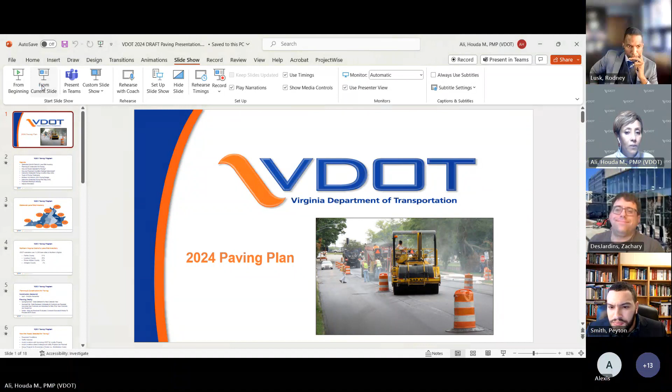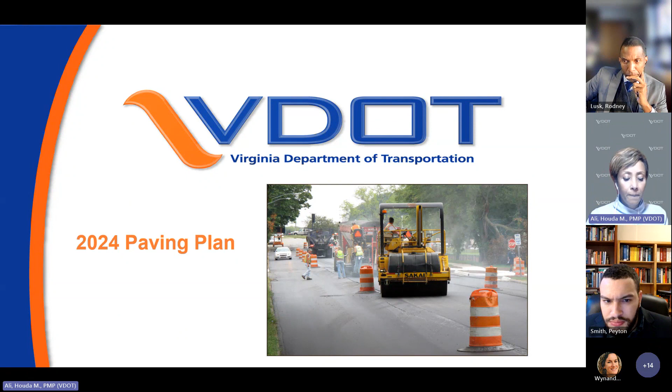On the agenda tonight, we'll be speaking about the state lane mile inventory and lane mile inventory for the Nova district. The planning and construction is part of the paving schedule. We will also cover the process for how roads get selected for repaving and how the pavement condition is determined using the CCI rating system.

We'll present information about the dashboard and the pavement condition targets for this year and the various types of pavement treatments, and speaking about this year's budget as well, and the different types of pavement marking and striping before we transition to the county's presentation on the topic.

As you can see here, Nova District has over 14,000 lane miles. To put this in perspective, it is the equivalent to going to the West Coast and back 2.5 times. The actual number might be higher than what this slide shows because it does not include the lane mileage for ramps and the recently added roads.

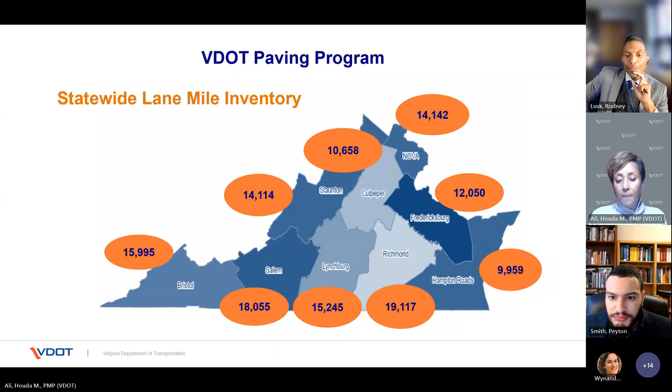The construction aspect of the paving is seasonal, and it takes place during the warmer weather months from spring to summer to early fall. However, the planning process for paving is a year-round process.

The process starts in spring going into summer with data collection for the next season. Over the summer into fall, we start analyzing the data, determine how much need is there compared to available funds, and prepare schedules and coordinate with central office. Then in winter, we close out the contracts, put out new contracts for bids, award and execute the new contracts by early year, February into March.

How do our roads get selected for paving? This is a question we get quite often. VDOT identifies roadways which are selected for paving by using the Critical Condition Index, or CCI, system.

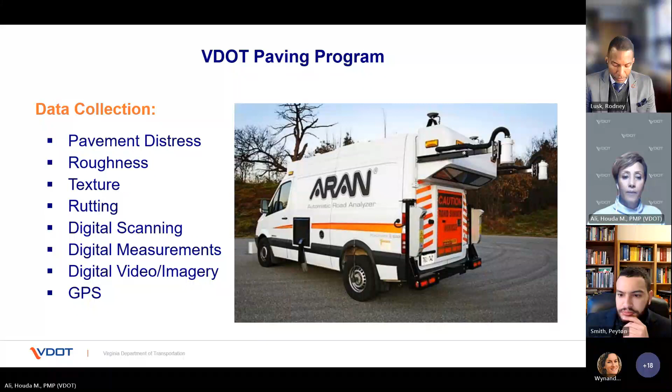The frequency of data collection depends on the type of roadway. Data is collected annually for interstates, primaries, and high volume secondaries — those with average annual daily traffic higher than 3,500 vehicles per day.

For low volume secondary roads below 3,500 vehicles per day, with route numbers of 600 or higher, which make up the majority of the mile inventory including residential streets, we cover 20% every year, with the goal of covering the full lane mile inventory every 5 years. This lower frequency is because of the higher mileage and limited resources.

Once the pavement condition data is collected and analyzed, it gets a rating on a scale from 0, being worst, to 100, being the best, like in the case of a new road. The rating system we use is called CCI, which stands for Critical Condition Index.

We focus on very poor and poor roads with sufficiency ratings below 60 CCI. We do not pave or repave roads with ratings higher than 60 CCI.

On these slides, you see a screen capture of the VDOT pavement condition maps for 2023.

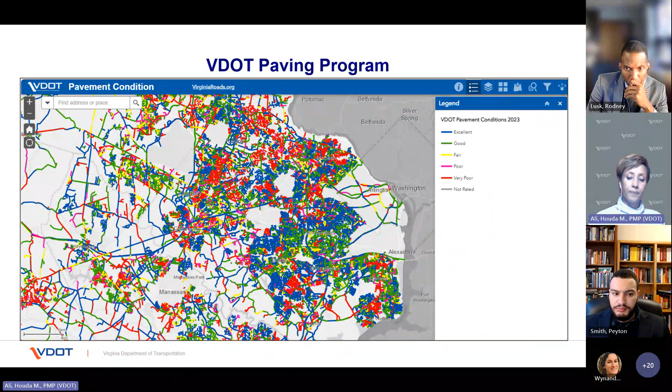In general, there are different types of pavement treatments, with two major ones. There is preventive maintenance, where we try to extend the life of the pavement by applying slurry seal. We also do limited patching and crack seal. Candidate roads are typically not in poor condition and have a CCI rating above 60.

The second type is corrective maintenance, where we do mill and overlay. 2-inch is most common, up to 4-inch depending on the road condition. This treatment is the most common and targets roads in poor condition.

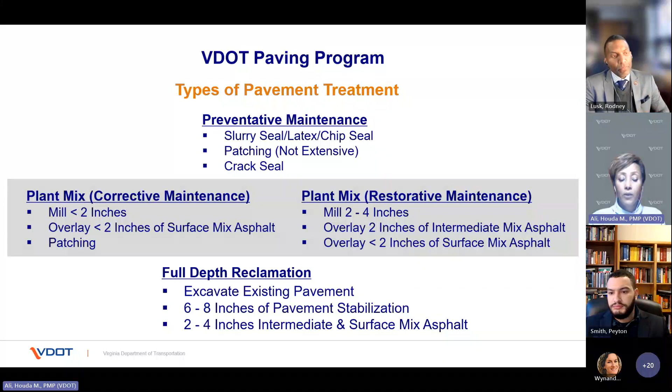The majority of roads fall into this category, with 90% of the budget going toward this type of treatment. In rare occasions, we may have to replace the pavement to full depth and rebuild the road. Roads targeted with this treatment are typically very old and were built to old standards.

It's also worth noting that while the budget increased this year, there is a downtrend in lane miles paved and an upward trend in cost per lane mile. These are due to inflationary pressures. What that means is we are not able to pave as much as we did in prior years because of the inflation.

Our VDOT infrastructure and maintenance teams have determined that about 43% of our low volume secondary roads have critical condition index, CCI, ratings in the 30s and 40s, indicating very poor condition and due for repaving. At current funding levels, we pave about 6% of the road network each year, and the NOVA district continues to work diligently to catch up on paving roads across Northern Virginia.

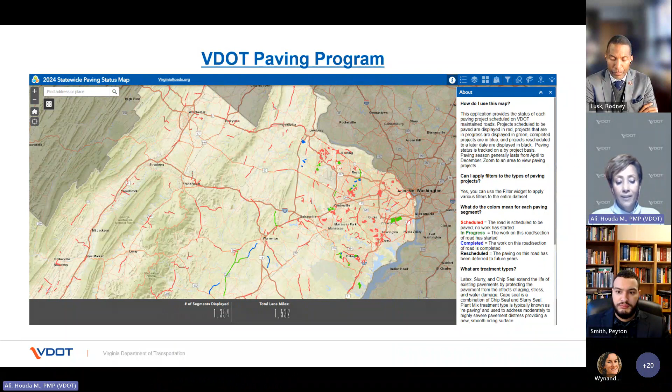VDOT tries to take advantage of the repaving program to implement road striping in ways that enhance public safety and operation. We strive most commonly to replace in-kind, putting back what was existing before we mill and repave. We may occasionally improve traffic conditions by extending a turn lane, for example. We also take the repaving opportunity to collaborate with the county to implement new marking patterns to reduce the width of travel lanes, enhance on-road bike routes, and add new crosswalks to improve pedestrian safety.

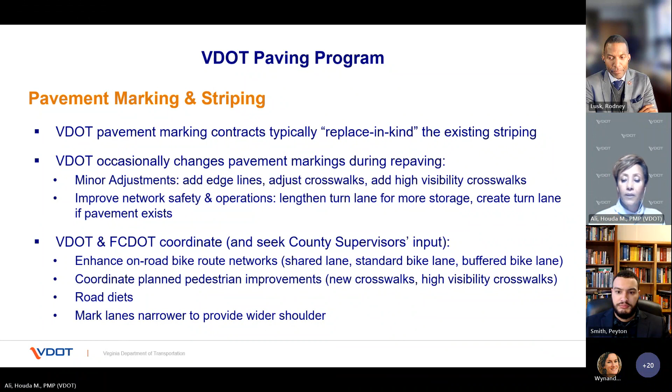Thank you, Houda. The VDOT staff do really work very hard to make the dollar go as far as they can in this program. We're delighted to present to you a couple different options for the Franconia district and the Mount Vernon district.

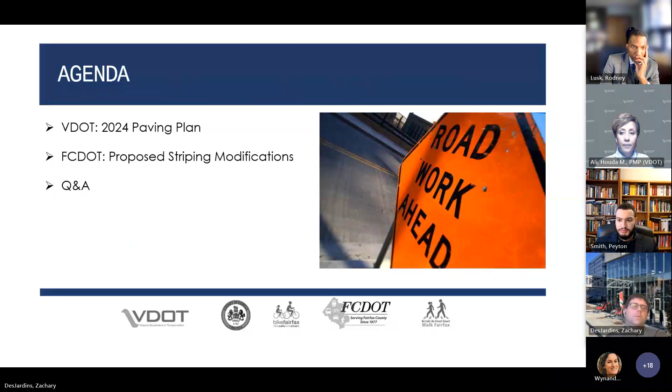So typically I'll explain briefly what our proposed striping modifications are. As Houda mentioned, VDOT and FCDOT collaborate to improve traffic safety. We review a draft repaving plan and identify opportunities for improvements, usually crosswalks and bike lanes, but sometimes other things like shoulders and bus stop relocations. VDOT will develop the striping plans and signing plans and coordinate implementation with the contractors doing the hard work of repaving your street.

Fairfax County leads the public engagement, that's why we're here tonight, as well as coordination with the supervisors. In addition, VDOT will identify and reconstruct substandard curb ramps to improve accessibility. Once the repaving is done, Fairfax County will come in and install the signage for roads that have gotten bike lanes or new crosswalks.

As I mentioned, we look for crosswalks or potential crosswalk locations. We study busy pedestrian crossings that don't have crosswalk markings to determine if they meet the VDOT warrant, essentially the requirements to mark them, and see if any parking restrictions are needed to improve visibility of people using the crosswalk to drivers. VDOT has done a great job in recent years upgrading existing crosswalk markings from the standard two lines to high visibility markings, which mostly look like piano keys. Occasionally we'll find a potential crosswalk location where we can pave a little island that we could eventually upgrade with concrete in the future.

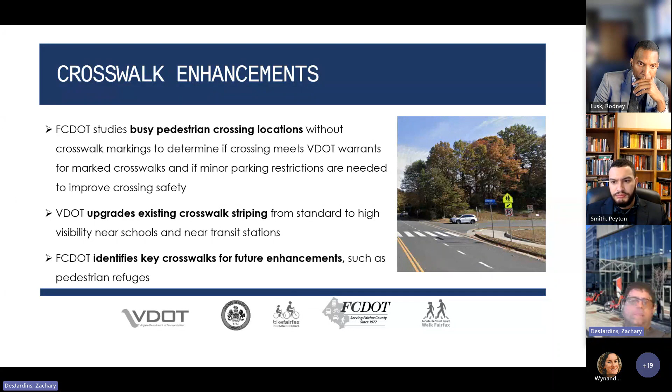In Fairfax County, many of our streets were built with much wider than needed travel lanes, or too many travel lanes, resulting in road safety issues such as speeding and inattentive driving. Repaving provides an opportunity to right-size the travel lanes and the roads, and also provide new bike lanes and turn lanes to improve safety for everyone. Typically we don't adjust traffic capacity at signals, and we usually maintain legal street parking, although we've got some options for you to consider tonight. We also have a countywide bicycle master plan, an important tool to help us add new bike lanes to meet the intent of that plan.

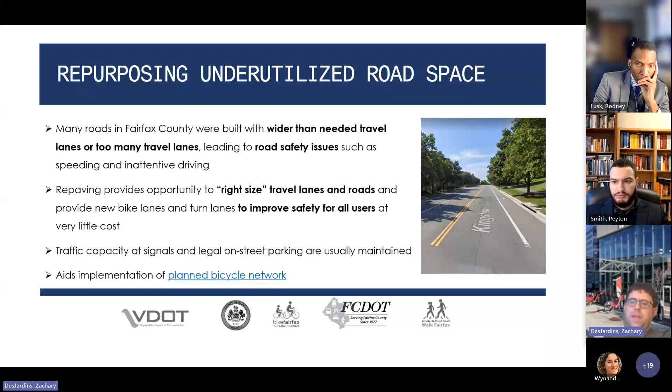There are a couple different kinds of bicycle facilities you'll see in Fairfax County. You'll see sharrows, which are just shared lane markings, though those are less commonly used now. Most commonly, we provide standard bike lanes, either next to a row of parked cars or next to a curb. We're trying to get more buffered bike lanes in our future projects, as well as some that we proposed to you tonight, so there's a bike lane and there's a nice space between you and the travel lane.

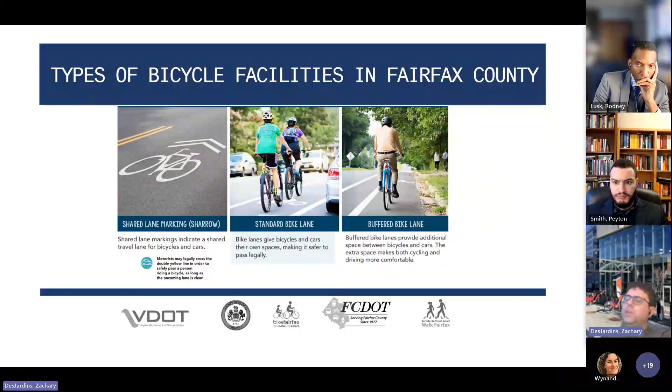Primarily the types of bike lanes we'll show you tonight are for cyclists who are strong and fearless, who will ride in any condition, and those who are enthused and confident. We do try, where possible, to create space that we could eventually upgrade to protected bike lanes, to attract some of those interested but concerned riders in the future.

While bike lanes obviously provide a benefit for people biking in terms of comfort and safety, they also have benefits for people who don't ride a bike. For example, we're able to reduce the crossing distance for people crossing the street. They provide a buffer, so if you're walking along a sidewalk, the traffic is moved out towards the side of the road, and you have a space in between instead of just having cars drive along the curb. They also reduce speeding and lower noise levels throughout neighborhoods, and improve visibility at driveways or side streets, because it shifts traffic from the edges of the road towards the center.

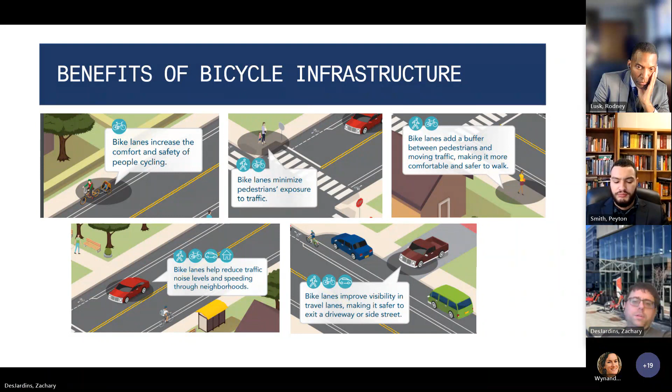The first bike lane project we proposed is over in Franconia District on Oakwood Road, only in the westbound direction between Van Dorn Street and Crown Royal Drive. Right now there are 2 wide travel lanes in that westbound direction and no bike lane. What we propose is to add a westbound bike lane by repurposing one of those travel lanes. Oakwood Road doesn't have a lot of traffic in this direction, so we could do this without impacting traffic. This bike lane will provide a useful route connecting to the bike lanes on Crown Royal Drive, as well as the new side path along Van Dorn Street, which runs up towards the Van Dorn Street Metro in Alexandria.

Also in Franconia District, not far from Oakwood Road, are 2 proposed crosswalks. The first is at Crown Royal Drive and Founders Hill Drive, just down from the bike lane on Oakwood. It's a nice way for folks to cross the street, since there are homes on both sides as well as a bus stop on either side, providing a way for bus riders to get from one side to the other.

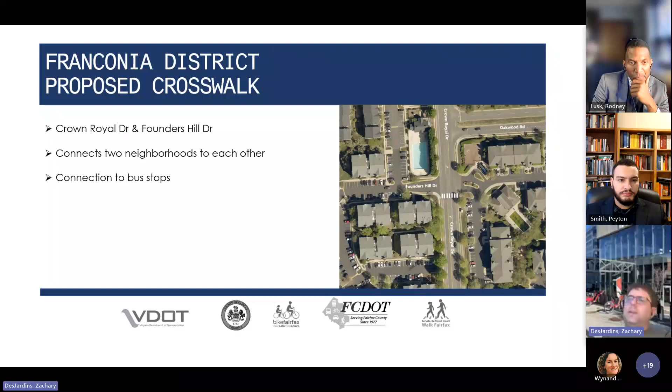Just north of that, over at Crown Royal Drive and Terrapin Place, there's a little private trail as well as one of the apartment offices, so we thought it'd be useful to have a crosswalk connecting those two spaces. Since Crown Royal Drive already has bike lanes, no parking needs to be repurposed to install these. That's the wrap for Franconia District.

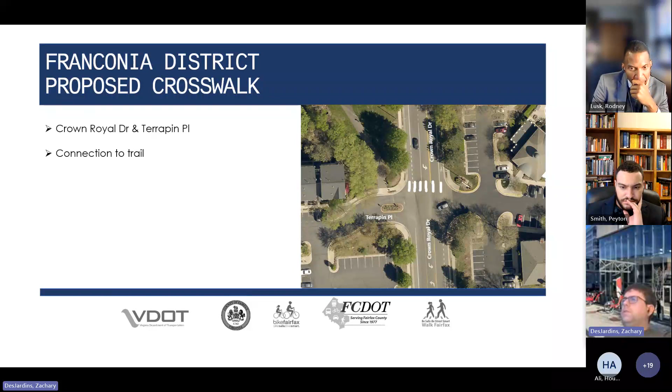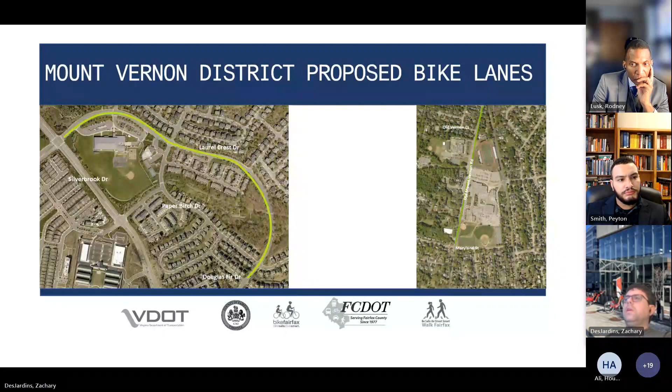For Mount Vernon District, we have 2 proposed bike lanes and some crosswalks in 2 locations: Laurel Crest Drive and Old Mount Vernon Road. Laurel Crest Drive runs between Silverbrook Road and Douglas Fir Drive, and right now there are between 2 and 4 wide travel lanes, between 0, 1, or 2 parking lanes, and no on-street bicycle facilities.

Per our countywide master plan, we propose to add bike lanes by narrowing the travel lanes where feasible and repurposing some underused parking lanes. This provides a useful connection between Laurel Hill Elementary School and the Cross County Trail. The example photo here is over on nearby Armistead Road, which used to have 4 travel lanes, 2 in each direction. We simply removed 2 of them, added a center turn lane, and added bike lanes. As I mentioned earlier, we try to add a buffer to the bike lane wherever space allows.

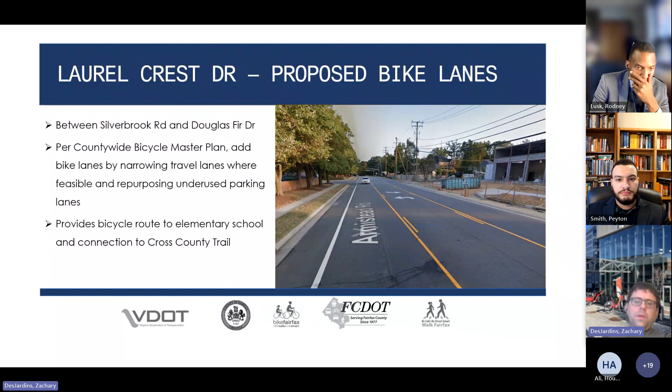One of the interesting, unusual things about Laurel Crest Drive is they actually have two different types of parking signs. The parking sign here on the left is VDOT's official sign. In fact, you'll often find a sticker on the back, there might even be a warning saying 'do not remove by penalty of law.' And then there's another sign over here that says no parking on school days except by permit, district XX.

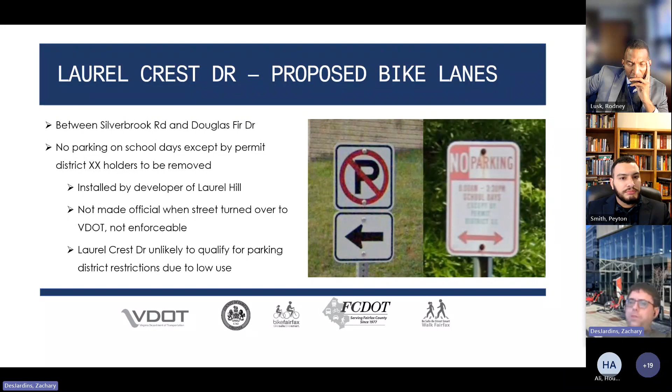And they're also just observing the use of parking on Laurel Crest Drive. In order to qualify for those, it's unlikely that street would, because a lot of the parking wasn't heavily used throughout the street. It was only heavily used in a few sections.

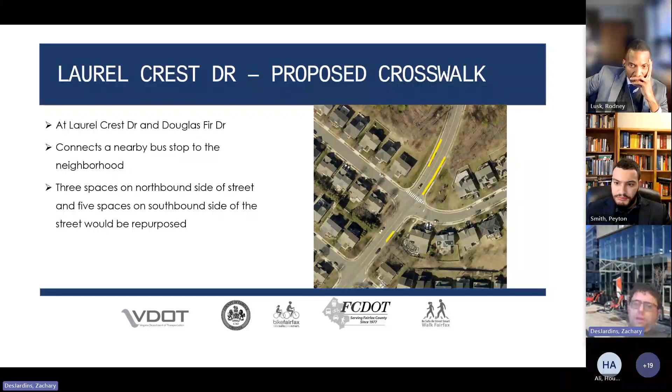So that's it for Laurel Crest Drive. Now we're going to move on to Old Mount Vernon Road. Old Mount Vernon Road is over near Route 1, adjacent to Mount Vernon High School and Riverside Elementary School, and it runs between Drews Court all the way down to Maryland Street.

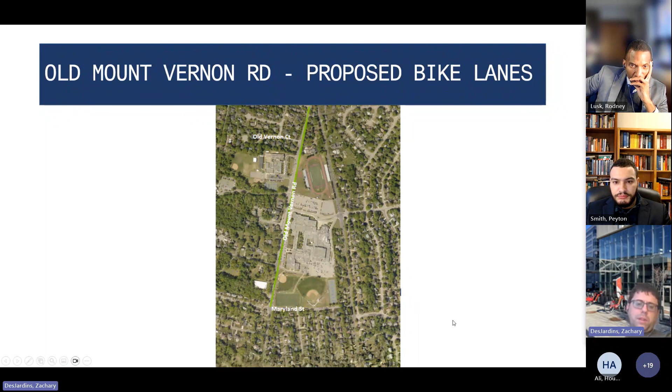And so right now, if you go down there today, there are 2 very wide travel lanes, and depending on which side of the street you're on, there's between no parking on the street to 1 parking lane or 2 parking lanes, one on both sides, and of course there are no bicycle facilities.

What we're proposing to do is add bike lanes or buffered bike lanes. Most of the street parking would be maintained. It'll provide a safer route for kids to ride to and from school, and the narrower lanes would reduce speeding. This is an example over on Parker's Lane, also in the Mount Vernon district.

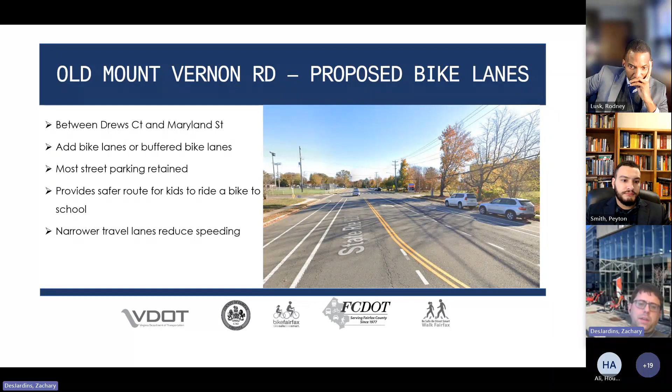One of the things that we looked at when we were out there is that some of the existing crosswalks wouldn't meet the current requirements for safety. So we want to make sure that people using the crosswalk are visible to drivers, as well as crosswalk users can see oncoming traffic.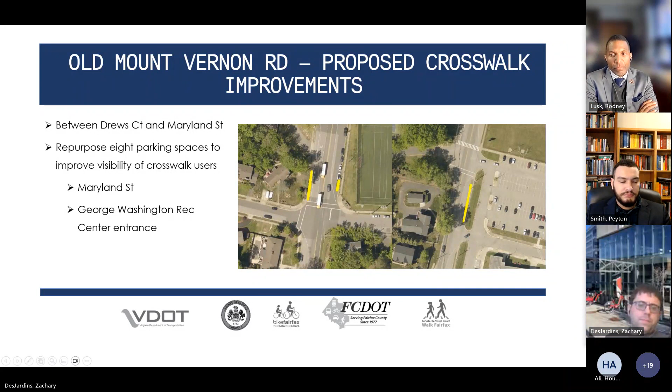In addition, we have something a little unusual. We measured the turn volumes that use the existing right turn only lanes along Old Mount Vernon Road, going into Old Mount Vernon Court, Becherer Road, and Maryland Street. We found that they didn't meet VDOT's current warrants, and in general these are low volume neighborhood streets, so we're proposing to remove them to provide a more continuous bike lane and reduce crossing distance for people walking.

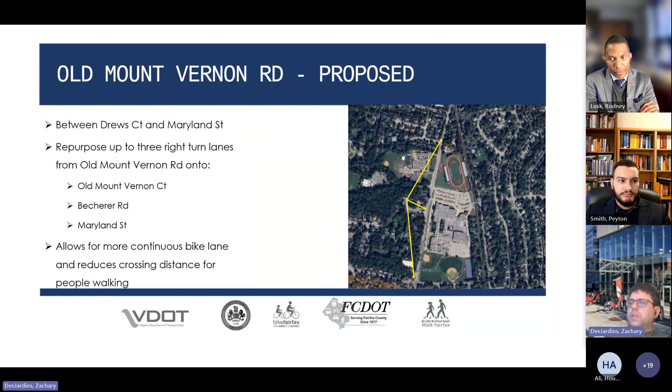Here's an example of Maryland Street, where we have a very wide crossing distance with a right turn only lane. We propose to remove that so we can reduce the crossing distance, so kids only have to cross 1 or 2 lanes of traffic instead of 3.

Then there's Becherer Road, again a fairly low volume turn into the street. And similarly, the right turn only lane down to Old Mount Vernon Court would allow us to extend the bike lane a little further up the street than we otherwise would.

As Huda mentioned earlier, if you have any paving related comments — drainage issues, missing signage, signal repair, walkway repair, or sight distance issues due to vegetation overgrowth, especially as we get into spring and summer — please submit them to the MyVDOT portal. If you'd like to request road repairs, you can select the 'I need a road repaired' link in that portal, or call 1-800-367-7623. We also have the project webpage here.

We'll have a survey, and we're accepting responses. Those are due in about 2 weeks, on April 22nd. We welcome any and all feedback. This will be collected and provided to each supervisor to make a decision as to how to proceed.

Here are the two links to the feedback forms. The first one is for Franconia District, with a link right here. There's also an option to leave a voicemail — you can call this number and enter this project code to leave a voicemail for us. Same thing for Mount Vernon District.

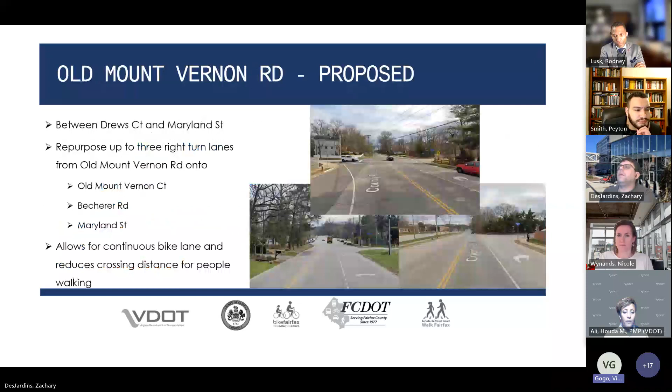And if I may, with Peyton, I believe you mentioned it's a road of high concern. My question then is, with the example that you presented at the beginning of the presentation showing how you addressed the speeding and driving issues there, I'm curious why it's not being addressed on this road when we know it's a road of high concern. That's for the extent of the paving. Yeah, if the other was a paving project, I'm just curious how this one wouldn't fall within that as well, although I understand as far as what has been turned over from the developer to the county and state at that point. I'm very aware of that and the timeline, but just curious about the earlier example that addressed and seemed to eliminate the aggressive driving. Was it this example? Yes, thank you.

The challenge to extend the bike lanes in that area, where the paving is proposed to end, is that we'd have to repurpose all the street parking there. Sometimes that's unpopular, people don't want to give up their street parking, and sometimes people do want to give it up so others don't park there. So at least at the moment, it's not currently part of the project. But if you feel otherwise, you're certainly welcome to write that. We have an open-ended box in our feedback form where you can let us know how you feel, and we'll certainly take that into account.

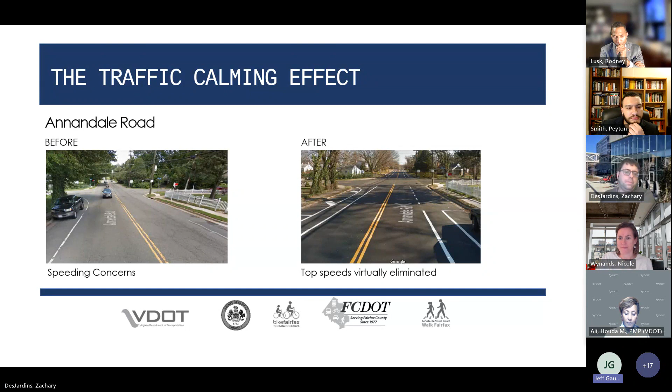I had two questions. First, I was glad to see bike lanes near Mount Vernon High School. In addition to looking at the bicycle master plan, do you also get feedback from the Safe Routes to School coordinator on bike lanes near schools? Yes, we did actually, we met with them recently. That's good, they were supportive. These kids really need a bike lane, there's a lot of kids you can see biking on that road.

My other question was, do you know what the status is on the Fort Hunt bike lanes from late last year? The challenge with that project is it required more work than we could have done during that paving cycle, so we have to invest a little more money and time and effort to get that across the finish line. It's a little more complicated than we thought, unfortunately, so it's going to take a little longer.

Will it happen this year, do you think? I think it's kind of hard to say. Hey Jeff, I'll text you and we can call about that, and I'm happy to explain it and walk you through the timeline. Okay, yeah, sorry, I know it's off topic. No, appreciate your interest though. Thank you.

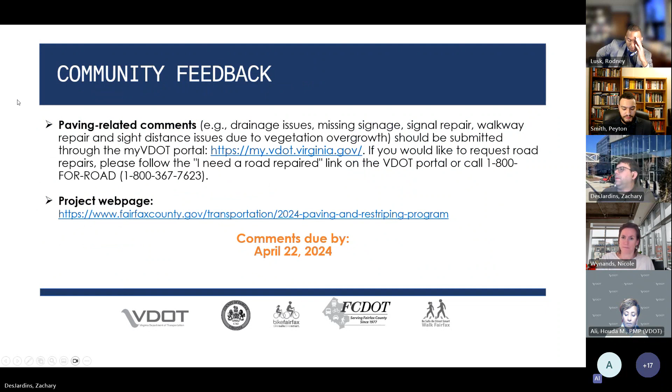I wanted to follow up on Vicki's questions and some of the responses regarding Douglas Fir. There were two things said that I wanted to correct if you'd take another look. The new paving doesn't begin at Douglas Fir, it's actually further up, closer to Gilroy. There's a patch where the new paving goes from closer to Gilroy toward Silverbrook, that is newer, but to say the new paving and bike lane installation stops at Douglas Fir would not be accurate based on the current paving situation.

The second point was that there was supervisor indication that parking was desired in that piece past Douglas Fir toward Silverbrook or Gilroy. Our community has been very vocal about removing that parking, going back to 2017, so that is not true. Our desire would be to eliminate that parking, we're on the record with that for numerous years.

So if we're able to submit a petition to have bike lanes installed the whole way to Silverbrook, I think that would benefit the community for use of the trails inside it, and for people on bikes to access into the community from Silverbrook. It doesn't make logical sense to end bike lanes at Douglas Fir, because then you'd have people on bikes navigating parked cars, and with the high rates of speed already noted along with parked cars and bicycles, I think that's kind of a disaster if that were to occur.

Thank you for your question. I should have been a little more clear about where it ends at Douglas Fir. I had my cursor here, so it'll go just past Douglas Fir, as you noted, right to where essentially the hill is, at the top of the hill, where the pavement becomes much nicer quality. So you're right, it does go a little past that. We're proposing to have the bike lane go a little past Douglas Fir, up the hill, and the current plan is to end it there. But if you feel otherwise, please put it in the comments, and we'll look it up, and I'll connect with Peyton to make sure your previous statements on record are accounted for. So thank you.

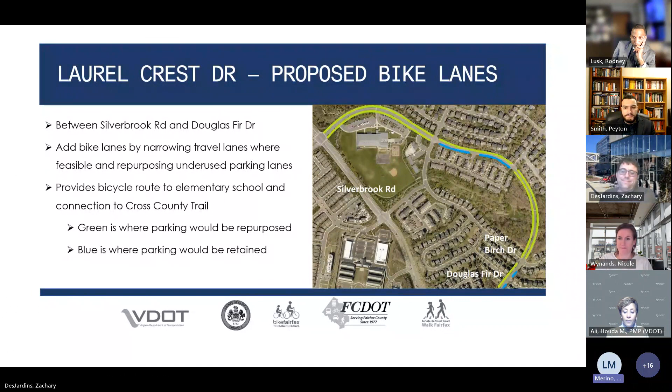Thanks, back to the Crown Royal Drive, a couple of follow-up questions. One, since the plan is to retain the existing striping, which has the bike lanes throughout that entire length of the road.

I've lived here for several years in the Sycamores community, and I've observed that sometimes people still take the bike lane for a parking space because of the lack of signage or markings on the pavement. I'll put this in written comments, but for tonight I'd like to note that if there are ways to make those bike lanes as visible and obvious as possible, that they are indeed bike lanes and not parking, that would go a long way, recognizing there are some smaller designated parking areas in different sections of Crown Royal. I think that's why people think the whole length of the road might be for parking. That's just a comment for your consideration.

My other question is about the Oakwood signal and the improvements there to add the bike lane so there's more flow through, which I think is a great idea. When I looked at the interactive map for paving, I noticed there's red markings for a future project at the Van Dorn interchange, and then south of Van Dorn, just south of the Oakwood signal, but there's a gap between the interchange and Crown Royal that's blank, not green, blue, or red, just nothing. I know it's adjacent and not directly related to the project, but because of its location, I'm curious if anyone can comment on whether there are plans to repave that section.